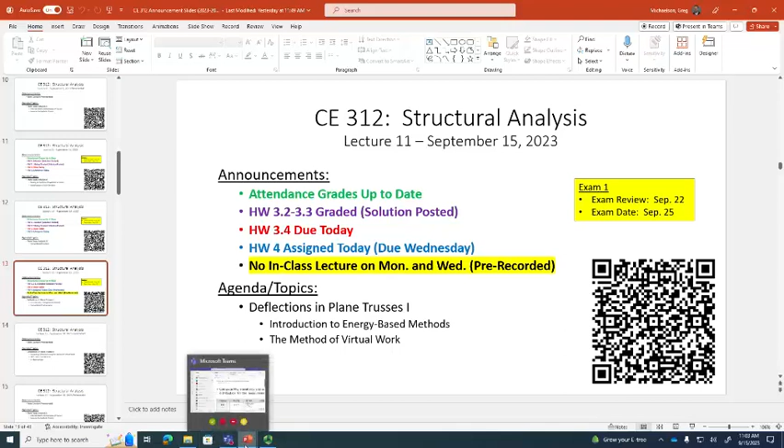Any questions? Okay, today what we're going to do is we're going to shift gears a little bit, and we're going to talk about an entirely different aspect of structural analysis, and that is deflections. Deflections, deformations, essentially the same thing. Up until now, what we've been focused on is looking at forces in structural analysis.

So we have a system. What are the reactions required to keep that system in equilibrium? Those are forces. What about trusses? We analyze the truss to determine the internal forces in each member. That's what I mean when I say forces. Now, I'm not saying those aren't important. They're incredibly important. You need those values in order to design.

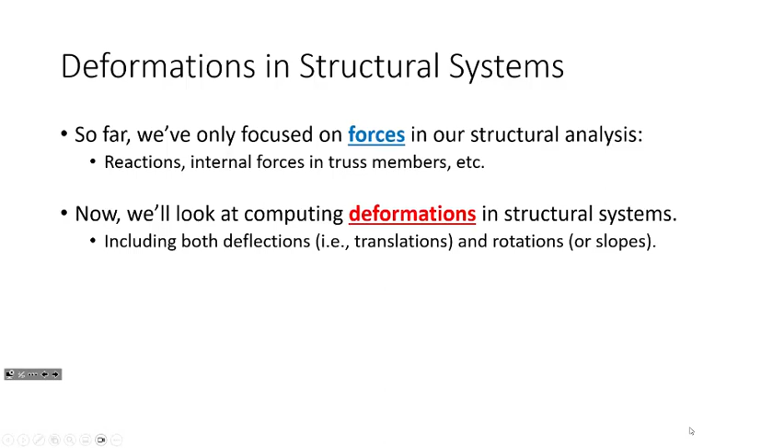But that's not the whole story. Every structural system that we utilize, when we apply forces, the system responds by deforming. It undergoes some degree of deformation, some degree of deflection, some degree of rotation, etc. That's what we're going to be taking a look at now, and we're going to start with trusses. The reason that we start with trusses is because the underlying mechanics for solving for deflections in trusses are among the easiest to deal with.

Deformations are incredibly critical to understand in structural engineering for a couple of different reasons. One of those is that we usually have deflection limits that structures have to satisfy. So as an example, we're in a building right now and we have beams and columns all over the place.

So if we're looking at, let's look at the ceiling here. Above this drop ceiling, there's a series of beams and girders that are supporting the weight of the floor above us. Let's say there's a floor beam that's going from this column right here, and it's connecting this way. Well, when we design that floor beam, we're going to have to understand the forces that are applied to it, so things like the shears, the moments, etc.

But on top of that, when that floor beam is subjected to load, it will deform, and so there will be limits on how much it can deform. A common limit that we use in building design is L over 360. So we take the length and we divide it by 360, and whatever that distance is in inches is the maximum amount it can deflect. That's a common one for buildings, and we'll talk about a little bit later about why that is.

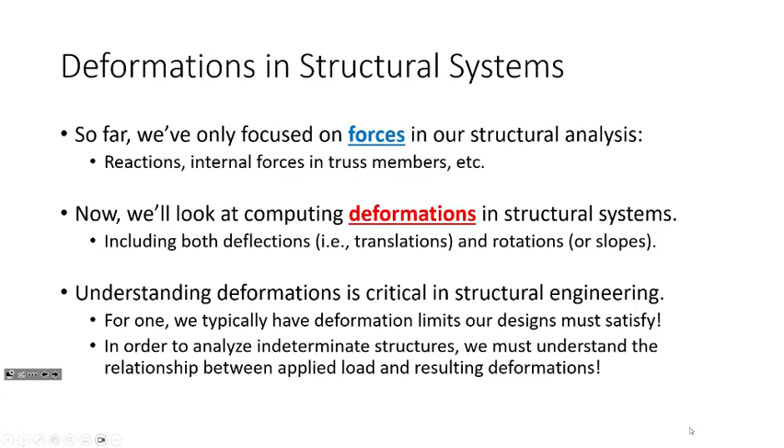So we'll have multiple limits that our systems need to satisfy. The other reason for understanding deflections is because it is the relationship between applied forces and resulting deformations that makes indeterminate analysis possible. You cannot analyze a statically indeterminate structure without understanding this relationship. If you remember, statically indeterminate structures are when we have more unknowns than equations of equilibrium. So how do we solve for those additional unknowns? We utilize the relationship between applied loads and resulting deformations, and it's that relationship that drives all sorts of advanced analyses. If you've ever heard of finite element analysis, that's how it works—it characterizes that relationship. Don't worry if you've never heard of that, we'll discuss it later.

Now I want to show you right at the very beginning how we solve for deflections, because usually engineering students are like, just tell me the answer, just tell me how we do it. So I'm going to, but I need you to understand why, because the method is a little different than probably what you're expecting. So I'm going to consider the following truss.

First off, is this truss familiar? We did this truss, we analyzed this truss in class. This was our first in-class truss example. We analyzed this truss, okay? Now I have here an illustrative example.

Let's say our goal is to determine the vertical deflection at B. Here's the structure—I've got 10 kips here, 15 kips there, 20 kips there. When I apply load, I propose that the structure deforms. I want to know, after we apply that load, how much it deforms at B, specifically how much it deforms vertically. So that's going to be the goal. We're going to use that just as an illustrative example to show you how this works.

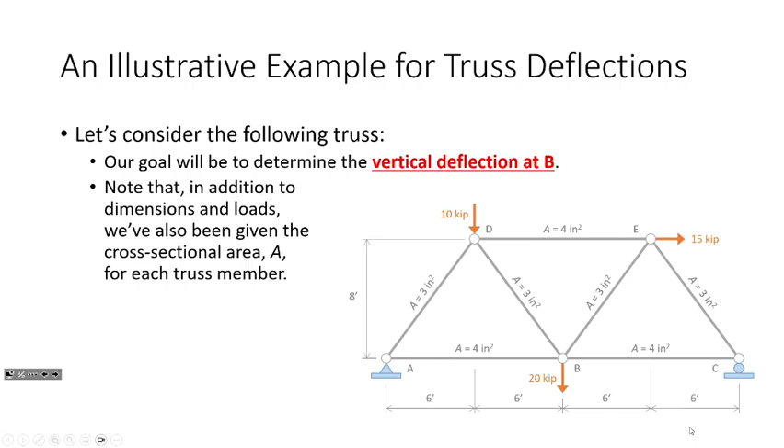Now one thing worth mentioning is that there's some new stuff here in our model. For each member, I've given you another piece of data I didn't give you before—I'm giving you the area. So if I take this member, let's say member BC, and I slice through it with a lightsaber and look at it, I get an area of 4 square inches. That's how big member BC is. With me so far? So I propose that in order to do deflection computations, we now need to start to look at the constitutive properties of the structure. We either need to know them in advance or they need to be a goal of the problem to solve for. Well, we not only need areas, but we also need material properties.

And so for the sake of discussion, I'm going to assume that this truss is made out of aluminum, and the Young's modulus, or the elastic modulus, of aluminum is 10,000 KSI. Those of you who have had mechanics and materials know what I'm talking about when I mention Young's modulus—the relationship between stresses and strains.

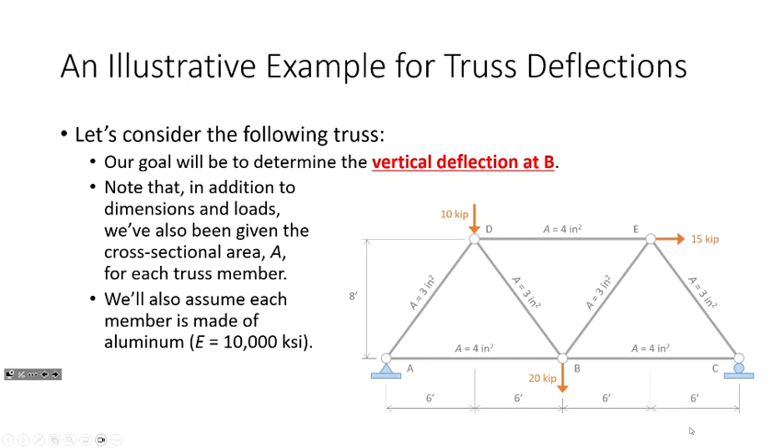Now, ultimately what I'm going to be arriving at is the method of virtual work. That's going to be the method we use to compute deflections in this course. And as I said earlier, sometimes engineering students just want me to tell them how it works. So this is how it works in a nutshell.

So the first step is you perform what we're going to call real analysis. Real analysis is just taking the truss and analyzing it for the loads that were originally on the structure. So we compute the reactions, analyze the truss, and we get this. We've already actually done this truss in this class, and these numbers I'm coming up with right here—this is what we did before. Are you with me so far? So here's the original structure, the real structure.

That's step 1. Step 2 is to take all of those loads off the structure and do the truss analysis again. But the second truss analysis, which I'm calling the virtual analysis, is a very particular truss. We take the original truss and we put a single load on it. Where do we put that load? We put it at B. Why? Because we're trying to find the deflection at B, right? So that's where we put the load.

I'm putting the load downward because I'm interested in vertical deflections, and I'm placing the load downward because I'm assuming that this joint deflects downward after all these loads are applied. The magnitude of that load is 1. We'll get to why that is in a bit, but for now, if you just want to know how to do it, that's your answer. So we place a single unit load.

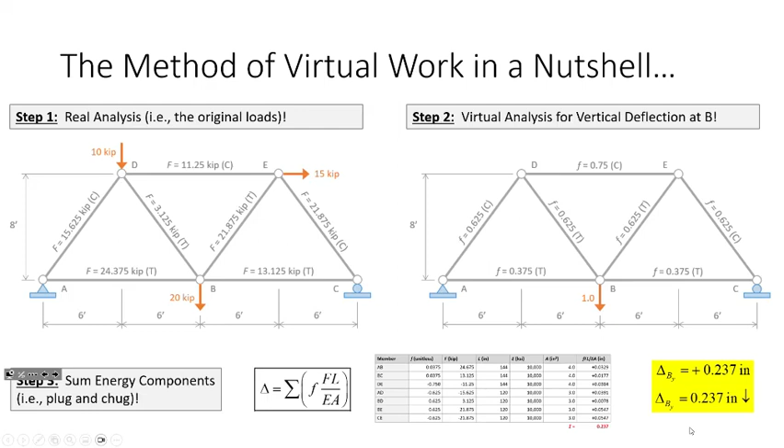So if you wanted, you could use that knowledge and actually do homework for yourself right now. There's really theoretically nothing stopping you. But I want you to understand what we're doing and why we're doing it, because I'm sure some of you are wondering where did you come up with that. Don't worry, we're going to get there.

Now, where this comes from is a method, or a class of analysis tools in physics, called energy methods. So what I want to do is talk about energy methods and the different types of energies that structures see. Some of you are thinking, energy methods, that sounds kind of fancy—it's really not. Everybody here has done energy method problems at some point.

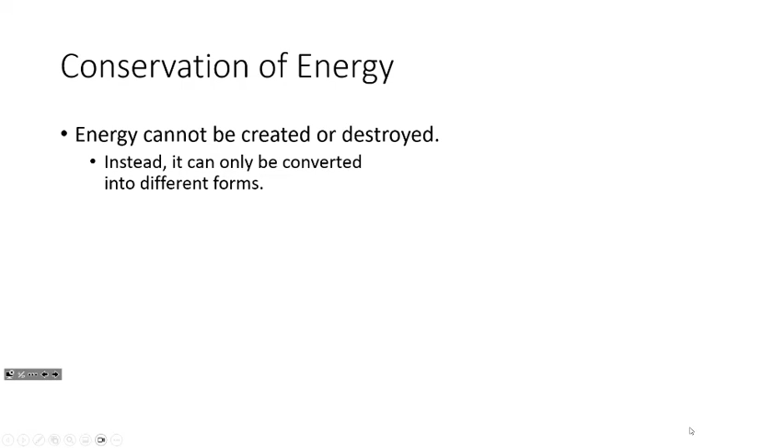Everybody has. Let's go back to the law of conservation of energy: energy can't be created or destroyed, right? It just gets converted from one form to another. So, for example, we've got here a screenshot from a very awesome video game. We've got this Goomba, sitting on top of this platform.

The Goomba on top of the platform has a gravitational potential energy of mgh. Then as the Goomba walks off the platform and starts to fall, that potential energy gets converted into kinetic energy, which we compute as 1/2 mv squared. Since energy cannot be created or destroyed, we recognize these two energies are equal to one another. If we set these two quantities equal, we see the m term cancels. This is how we know in physics that, neglecting air resistance, if we drop a bowling ball and a marble off a building, they fall at the same rate. Everybody's done this before, right?

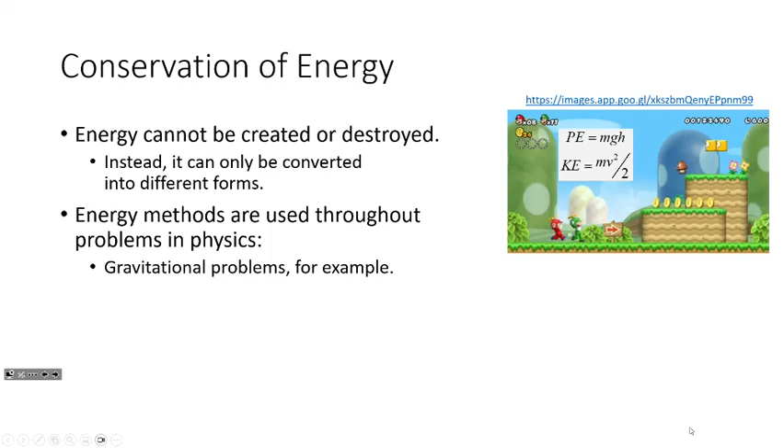I propose that we are going to apply the same concept in structures. And how's that going to work? Well, we're going to go to a different video game. Let's say we've got Link here, and Link's got his bow, and he's drawing the bow to shoot the arrow. How's this working?

So I have here a rubber band, and I have here some ammo, right—from, I'm sure you've never done this in middle school or high school, am I right? Never happened, right? Okay, so how does this system work?

Okay, so I want you to think of the rubber band as my structure. I'm taking the structure and applying a deformation to it. What's happening as I deform it is I'm storing energy inside the rubber band. That's evident by letting the rubber band go and it flies out, right?

But what happens if I take the rubber band and pull it back really far? In order to pull it back that far, I've got to use more force, I have to apply more load. But with that more load comes more energy, because now it goes even further. So there's a relationship between the amount of force I apply to the system, the amount of energy it stores, and the amount that I've deformed it. The further I've deformed it, the more load applied, the more energy stored. Does that make sense? So there's a relationship between deformations and energy.

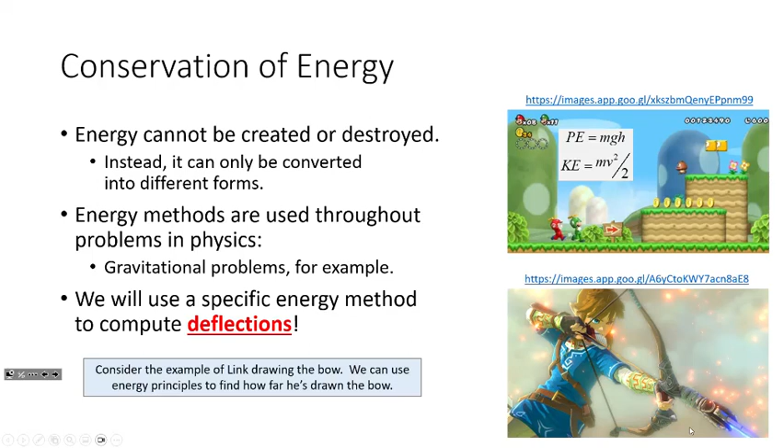And that's what we're getting at when we talk about energy methods - we're going to use that relationship in order to compute deflections. Okay, does that make sense?

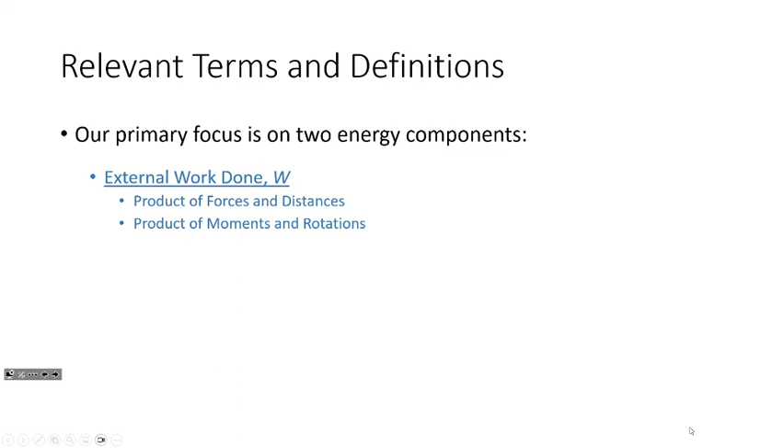All right, so I want to go through some basic terms and basic notation because I'm going to be using this throughout the slideshow. What we're going to do is look at two different types of energies that a system is going to be subjected to. We're going to use the terms W and U.

W is going to correspond to the external work done to the system. So if we think about my rubber band analogy, or the analogy of a person drawing a bow, W corresponds to the relationship between applying the force and the arrow moving - that force times distance. U is the stored energy, the amount of energy stored in the rubber band or stored in the bow.

And I propose that those two have to be equal to one another in order to conserve energy. So for all scenarios, this external work done has to equal the stored energy.

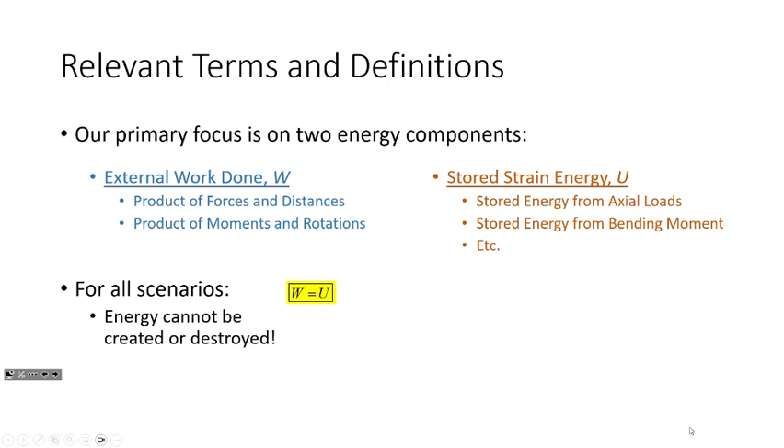Okay, a couple notes before we move on. So we're going to assume for this discussion that all the behavior of our structures is linear and elastic - in other words, they behave like the rubber band. If you go back to Engineering 216, what does linear elastic behavior mean? You have a system, you apply load, it responds in a linear fashion, and elastic means that if you let that load go, it reverts back to its original shape. And that's what we're going to assume for structural behavior, and that is the case for most structural analysis problems in the real world. It's not always the case.

There are some instances where you consider nonlinear analysis, like in seismic and dynamics and things like that. But for the most part, most everyday structural analysis is considered linear elastic. Now, we can consider other forms of structural response, like torsional response, thermal response. For the types of analysis problems we're looking at here, we can kind of neglect these. My main point is that you can use energy methods to solve all sorts of simple or complicated problems - that's why it's so ubiquitous in advanced analysis and whatnot.

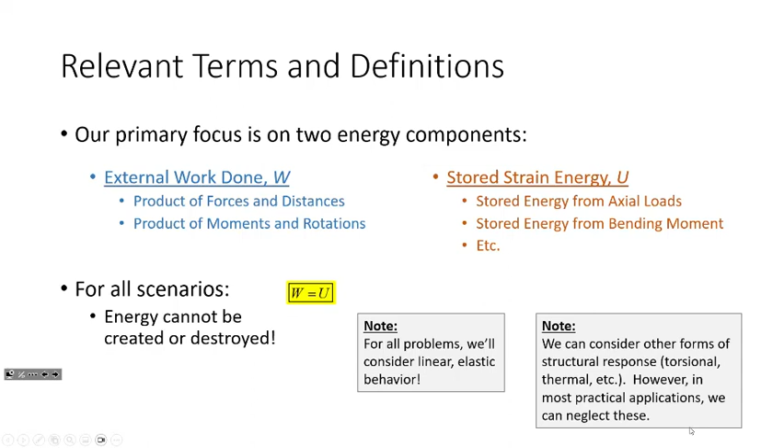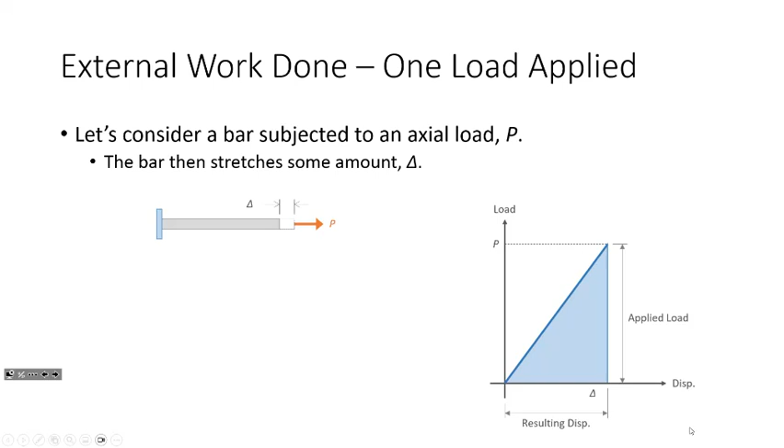Okay, so I want to look at external work done. Let's take a bar and let's stretch it some amount delta. So I propose that what I can do is say, from an external work perspective, the more load that I apply, the more deformation that I get. And if I'm trying to quantify the total amount of external work done to the system, I propose that's going to be the area under this curve, right?

Bringing it back to Math 29, right? But because we're dealing with linear elastic behavior, no need to break out the stretched-out curly S's, no need to break out any integrals, because it's a triangle. So I propose that the total external work done, if the load was applied gradually - and that's kind of the case here, because I'm applying the load gradually - the external work done is P times delta over 2, just base times height over 2. And that's the external work done to the system.

With me so far? And let's keep in mind, if we're thinking analytically, what's my goal? My goal is to try and determine this value delta. That's what I want to know - I want to know what delta is, I want to know how much it deforms. That's my goal, delta.

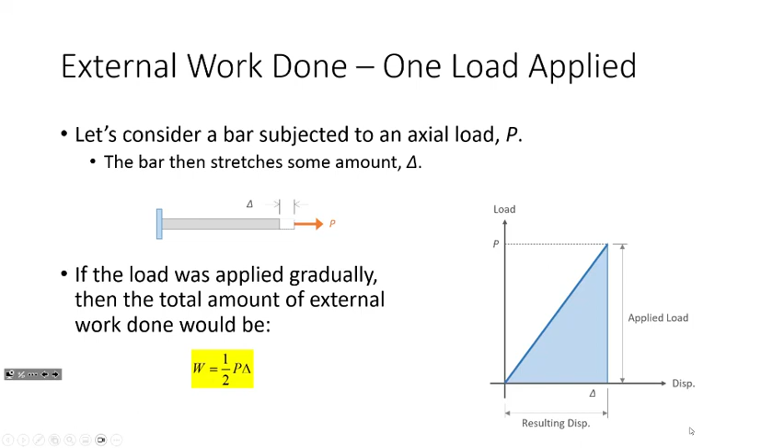Now that's the external work done. What about the stored energy? Okay, let's go back to mechanics.

Does anybody remember, if you have an axially loaded bar, how you determine the deformation? Does anybody remember that formula? You take the applied force times the length divided by EA. Y'all remember that?

Now, where does that come from if it's been a while since you've looked at that? Well, we've got our sigma equals F over A, right? Axial stress formula. That should be pretty familiar, right?

We've got our constitutive relationship, Hooke's law, that the relationship between stresses and strains can be defined by a constant of proportionality, which we call the elastic modulus or Young's modulus. And then we can say that strain is the change in length divided by the original length. Is this bringing it back? Ringing a bell? Change in length over the original length?

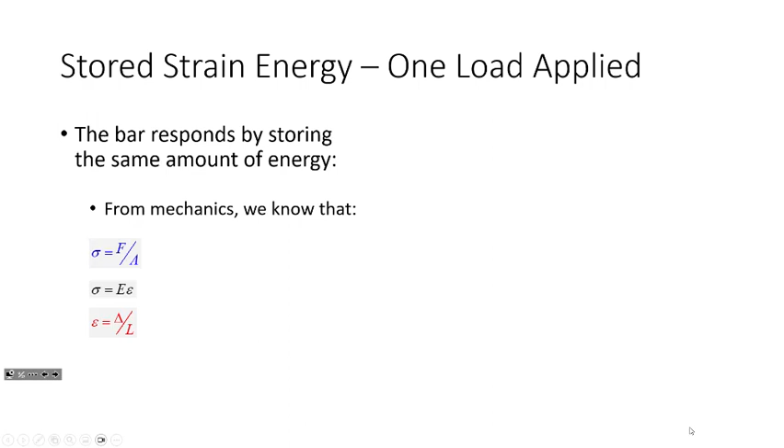So what I'll do is take this first equation, instead of sigma, write sigma equals E times the strain. Instead of sigma, let's write F over A, and instead of strain, let's write change in length over the original length. So that's where this comes from, and then I'm just solving, right? So I get delta equals FL over EA.

And so what I can do is I can write a similar curve, saying that for every amount of internal force, for every unit of internal force that's inside the system, I can increase a corresponding FL over EA. That's the deformation. Does that make sense?

So the stored energy is the area of this triangle, which is 1/2 base times height. And so that's where I get this expression right here. Okay, does that make sense?

All right, I don't want to go too fast in this. Again, if there's a detail here and there that you miss, don't worry, it's not the end of the world, but I want to make sure conceptually you're following along with what's going on. So far, so good? Okay.

Now, one thing I do want to mention, some of you might be getting a little worked up about the notation. Like, why am I using P's for the work, but F's here? Okay, well what I'm saying is there is a difference between the applied force externally and the resulting force internally.

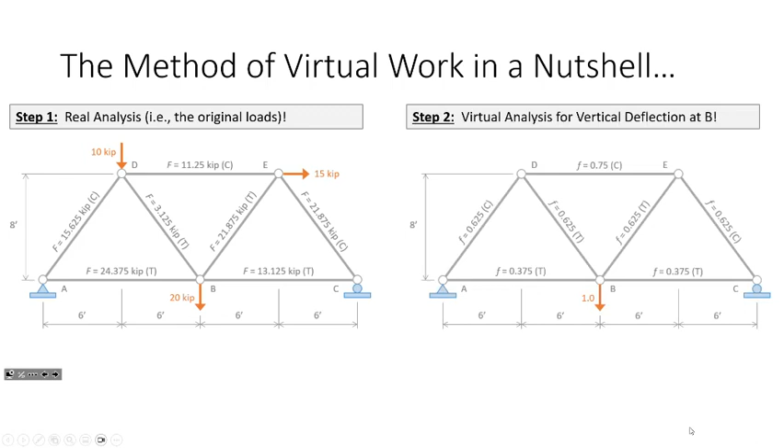So if you're seeing that and you're going, wait a minute, what's going on here, that's what's going on. Where was I? There we go. All right, so far, so good? Okay, so let's summarize where we're at so far.

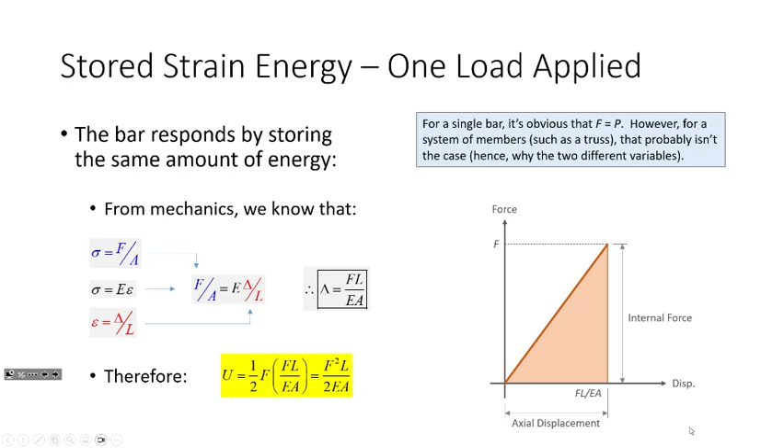So if we use the conservation of energy, you know that W has to equal U, what do we got? So for a single member subjected to axial load, we have the external work done, and we have the stored strain energy. Okay, that's for a single member. What about a system of members, like, oh no, a truss?

Well, if we have a system of members, the external work done is 1/2 P delta. The stored energy is just summing all of these for every member in the truss. Okay? Everybody kind of getting the idea?

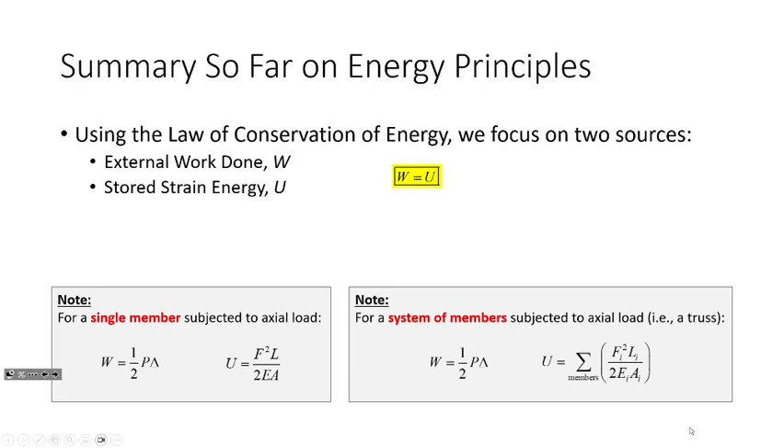Okay, now energy methods, what they do is they allow us to solve for deflections at a given point, but in order to quantify that energy, there's kind of a problem here. In order to quantify the external work done, we need a load at the point in question.

See, what we're doing right here, what this method is that you see right here on the screen, well you see this right here. This method is called the method of real work, okay? So what we're doing is we're taking the stored energy and the external work done.

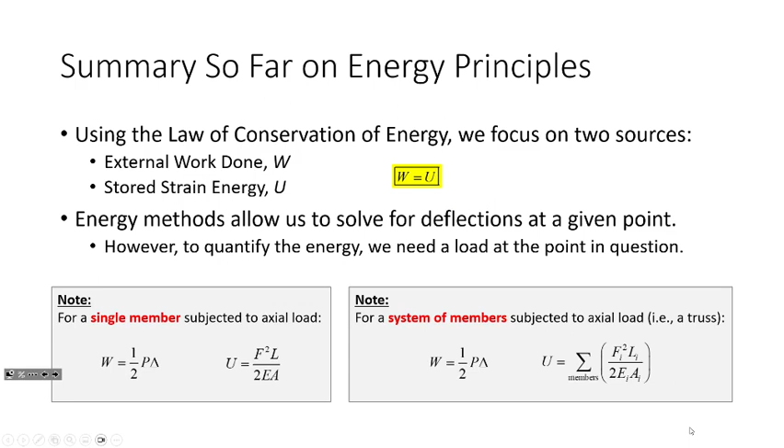We can set those two equal to one another and solve for delta. But there's a problem with that—that's the method of real work, and there's a big problem with it regarding the applied loads.

So let's talk about real loads and virtual loads. We've got an energy method that conceptually makes sense, but it's not enough. Here's the problem: the issue with this formulation, the method of real work, is in the formulation of the external work done.

I have that the external work done is 1/2 of P times delta, P being the external load applied. Remember that last truss we saw? How many different loads were on that truss? There were like 3 or 4 different loads. So which one do you use? Well, it's not that simple.

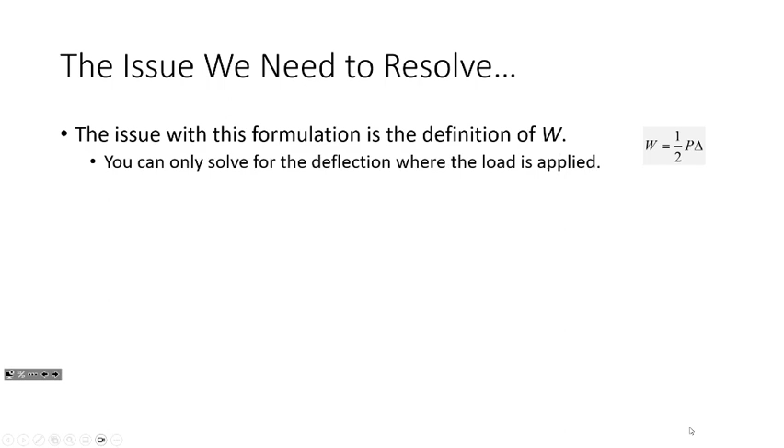You can only solve for deflection where the load is applied. If you've got multiple forces or multiple loads on the system, that makes it pretty difficult to isolate the deflection in question. It's very common in real world structures to have multiple loads all over the place. So the method of real work is not enough.

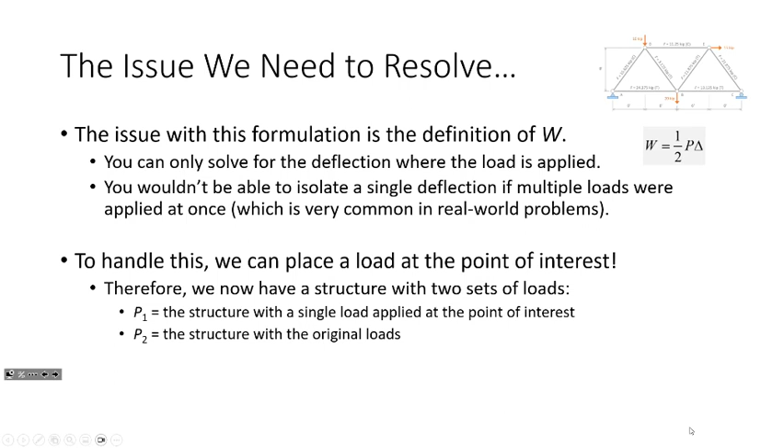So how do we handle this? We handle it by putting a load where we want to find deflection—we place a load at the point of interest. So what we're going to have is a structure with two sets of loads: one with a single load applied at the point of interest, and one with the original load.

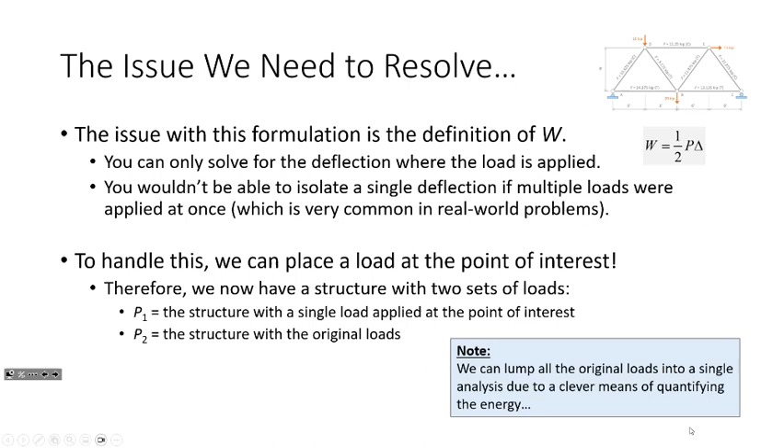We're going to get kind of clever with how we handle our energy, and clever with how we do the math, to make our lives a little easier mathematically. So let's go back to our bar example. What happens when we apply two loads? Let's see if we can clarify and flesh things out a bit.

The first thing we're going to do is apply P1 gradually. P1 is our virtual load—I like to describe it as a fake load. It doesn't really exist on the structure, but it's like a marker, similar to how in medicine they inject you with a tracer so that under an MRI they can see what's going on. P1 is kind of like that marker, allowing us to track the energy at the point in question. It's a fictitious load.

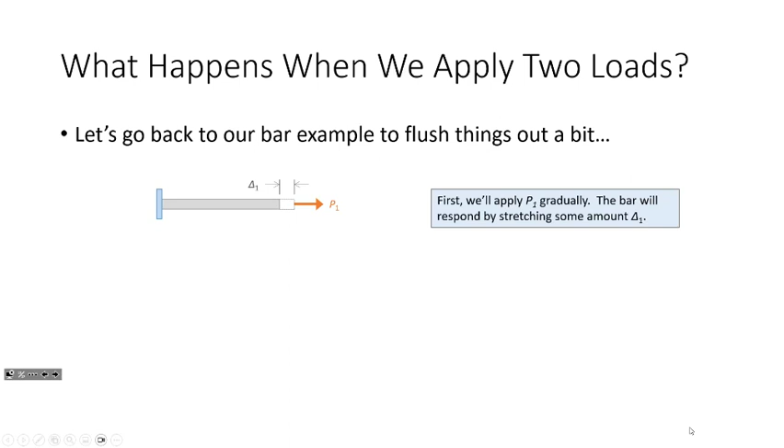First we apply P1 gradually, and the bar responds by stretching some amount, delta 1. Then we apply the real loads, P2—that's the real load, what's really on the structure. So at the end of the day, the total load is P1 plus P2, and the total deflection is delta 1 plus delta 2. Does that idea make sense?

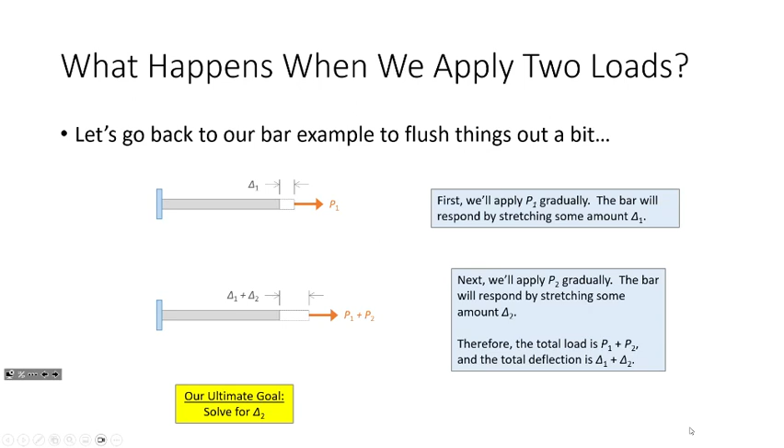Let's look at what happens when we graph this out. Remember, our ultimate goal is to solve for this real deflection. I don't care what delta 1 is, since it's due to the fake load I made up—I care about the real deflection corresponding to the real load. With me so far? Let's graph some things out.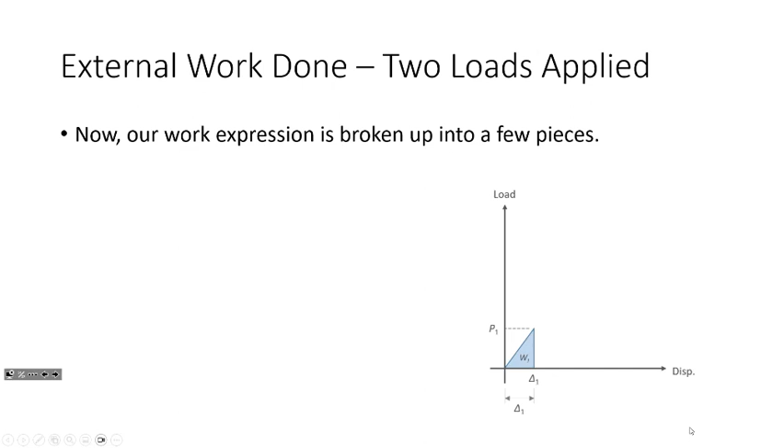So I've got a load-displacement curve here. First I put the fake load on—P1 corresponds to a deflection of delta 1. Then I put the additional load on top of it, so what I've got when it's all said and done is P1 plus P2 corresponding to a total deflection of delta 1 plus delta 2. The more load you apply, the more deflection you get.

So what I've got is this triangular region split up into different areas—I called them W1, W2, W3, just so we have something to reference. Let's write these out. You have to pay attention to your algebra: we've got 1/2 P1 delta 1, that's this one; then P1 delta 2, that's this one; and 1/2 delta 2 P2. You see what I'm doing here?

All right, let me take a step back and see. Does anybody have any questions so far? Okay, so that's my external work done. What about the stored energy?

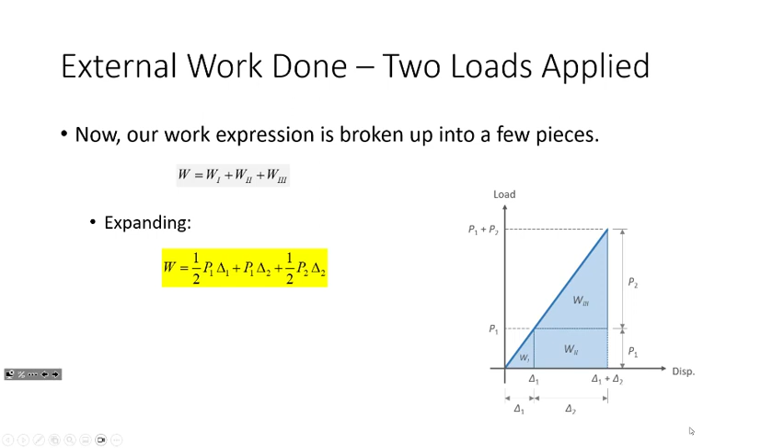Stored energy is kind of the same thing. Now I'm going to use some notation here, and this should be a little familiar. The little f's are the internal forces generated by that fake load, and the big F's are the internal forces generated by the real load.

So what do we got? We've got, you know, it's the same story. We got little load, little deflection, big load, big deflection. But let's look at the notation, right? Little f corresponds to little FL over EA, and what do we get here? Little f plus big F corresponds to little f plus big FL over EA.

And then what do we write? The energy terms the same way, right? So we take this area, 1/2 base times height, this one, base times height, this one, 1/2 base times height. A lot of symbols, I know, but does the idea kind of make sense?

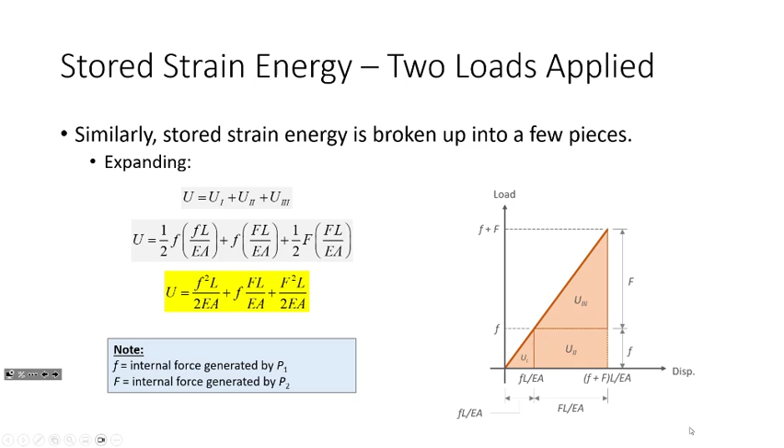All right, so let's take a step back. Let's separate it out. So there's my external work done, there's my stored energy, right? Now, what did we say? We said that energy can't be created or destroyed, right? So this energy component has to equal that energy component.

Now remember how I said we were going to get clever? Here's how we're going to get clever. I propose that if W equals U, if all these correspond, then W1 has to equal U1, W2 has to equal U2, W3 has to equal U3. And so instead of dealing with all this hullabaloo, I'm only going to deal with the rectangles, W2 and U2. So I propose those two equal one another. In other words, this term equals that term.

So I want to take this box, and I really want to focus on it a little bit. Let's see what's going on in here. So on the right, we've got some stored energy terms, right? But what's going on the left? We've got P1 times delta 2. What is delta 2? That was our goal. We wanted to find the real deflections, right?

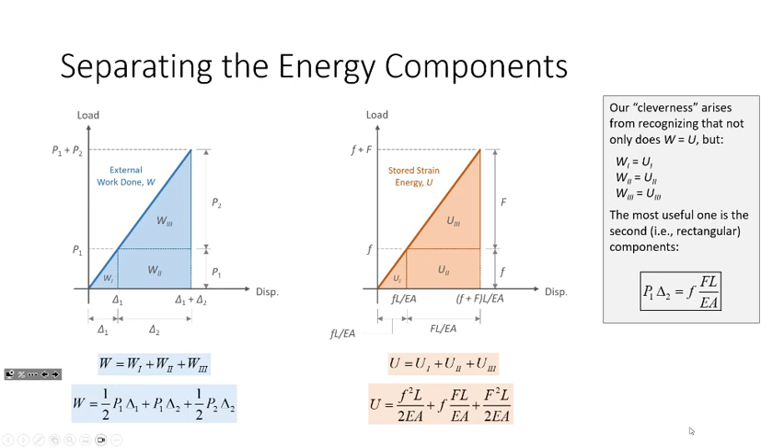P1, that's our fake load, right? That's our fake fictitious load. Now my question for you, my final question, if you were trying to make this as easy as possible, what would you choose for P1? 1, right? We would use the value 1, because if P1 is 1, we would get delta 2 is that. That's the method of virtual work in a nutshell.

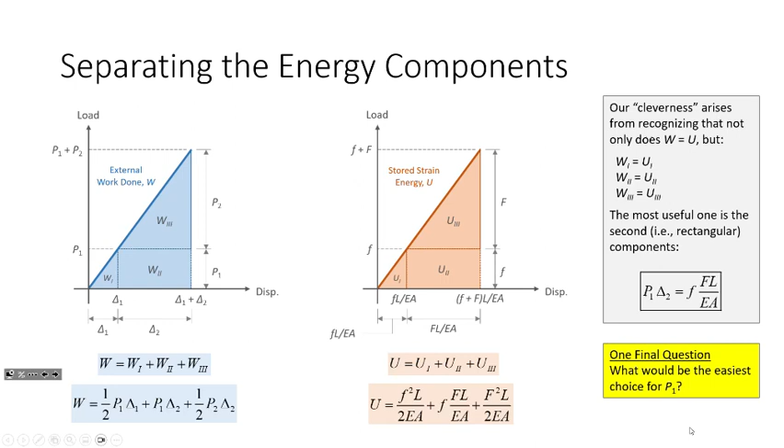Remember how we said that we would apply a unit load, and the unit load is 1? That's why. Remember, P1 is our marker load. We can choose whatever we wanted it to be, this fictitious load that we could use to track the energy. So we can choose whatever magnitude we want for P1. And so what's the mathematically easiest term to choose? 1. Make sense? That is the method of virtual work.

Okay, and I think now the crazy theory stops so we can digest what's going on here. So let's get into this a little bit. So this is the method of virtual work. It's also known as the unit load method. And what is it? It's an energy-based approach for computing deflections. The reason why I like the method of virtual work so much is because it will work for any structure subjected to any type of loading, period. Let me talk about that for a little bit.

So if you open your textbook, it has 2 different chapters on deflections, one chapter on energy-based methods and one chapter on geometry-based methods. And what you'll find is that there's oodles of different ways of computing deflections, especially when you get into geometry, but you find that those methods have certain limitations or certain advantages.

So I'll give you an example. There is a method for computing deflections in beams called the conjugate beam method. And it works fantastic when you have a bunch of point loads, because it does make the math a little easier. But whenever you have distributed loads or things like that, the math and whatnot can start adding up.

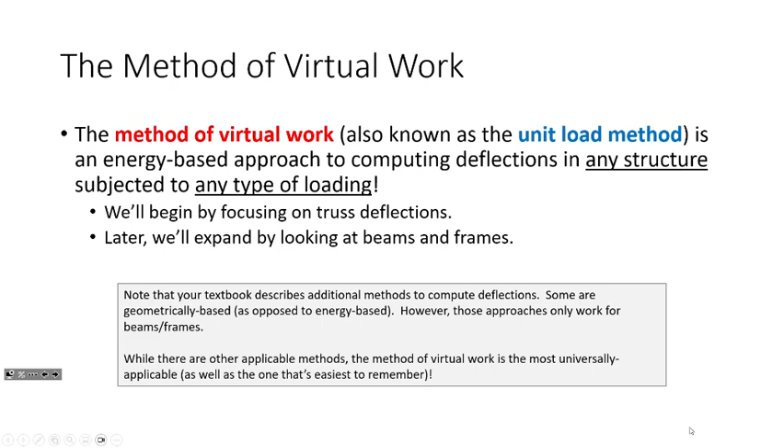But the beauty of the method of virtual work is it'll work for any structure, anywhere. That's one of the reasons I focus so much on it in this class: it's easy to remember how to do it, and it works all the time. It's really fantastic. We're going to use this method later for beams and frames. Right now we're just looking at trusses, but later on we're going to go back to this method.

Okay, let's go back to that example. Here's the truss. Now remember, we've got more data than before - now we've got areas and Young's modulus. Why? Because we need those quantities to start computing deflection, so we've got to have E's and A's in the picture. Later on when we look at beams, we're going to have E's and I's, the moments of inertia. So what do we do? We solve the structure.

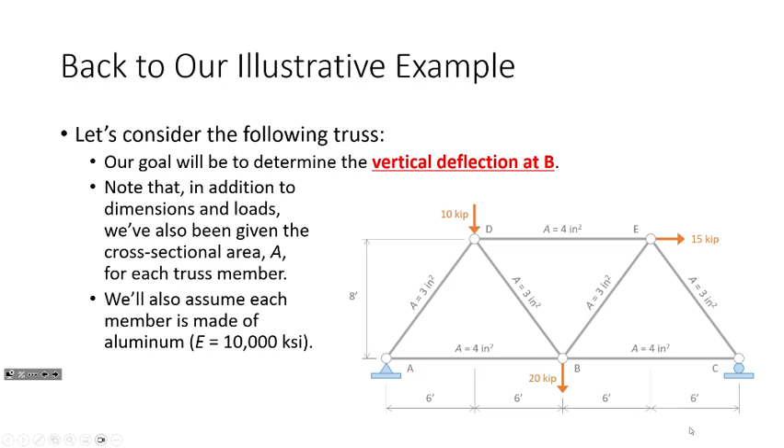We start off by determining the real forces inside the structure, so we get a real force for every member in the truss, and then we apply the virtual load. We take all the loads off the structure, remove them all, and now we have a new structure with just a single load on it. That magnitude of that load is 1, because if we set P1 equal to 1, that'd be the easiest case from a math perspective.

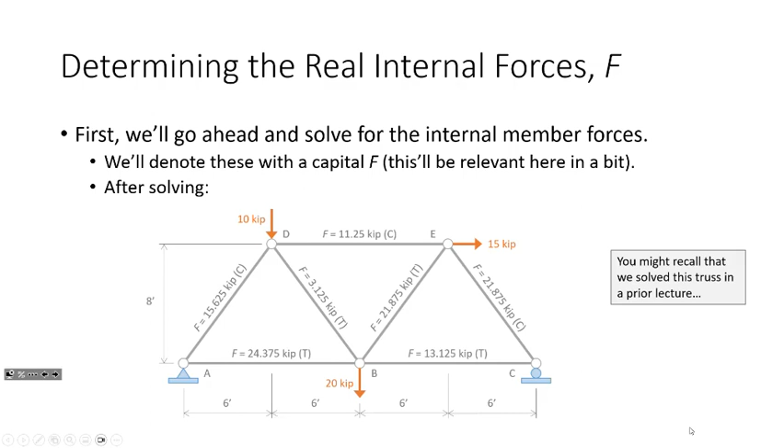We apply it vertically, because for this problem we're interested in vertical deflection at B. For example, if I asked a different question - what's the horizontal deflection at E? - I would place a single horizontal load at E. There'd be nothing else on the virtual structure but just a horizontal load at E. What direction do I place it? Whatever direction I assume the initial structure is going to deflect. If it was me, I'd look at this structure and say E is probably deflecting to the right, so I'd put a single horizontal load to the right at point E. The magnitude is 1, and you assume the direction.

And what do you do? You analyze the structure. Technically, the unit load is a load of 1. If you want to think of it as 1 kip, you can. Technically it's unitless, so the resulting internal forces are unitless. There is one downside - you do have to analyze the structure twice, which is why your homework's due on Wednesday instead of Monday. But the upside, hopefully, is that you can do things like recognize symmetry.

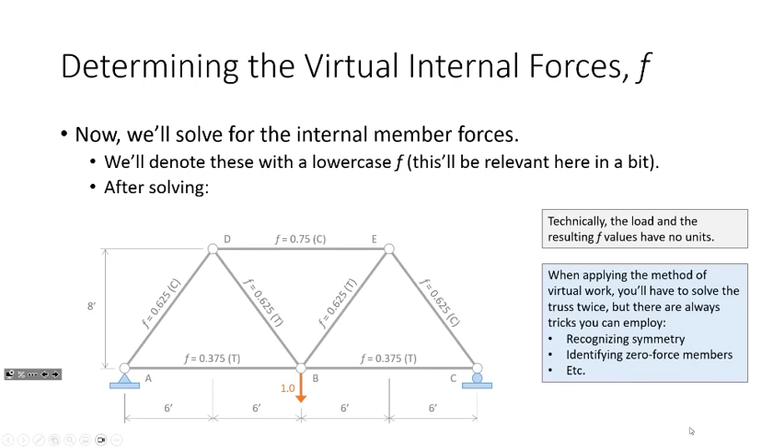You can recognize maybe there are zero force members. There might be a situation where a truss did not have zero force members for the real structure, but for the virtual structure it might. This structure is symmetric, so all we have to do is analyze that joint, maybe that joint, and then we're done because it's all symmetric. So it's something to think about - if you can exploit zero force members, it can make your life a little easier.

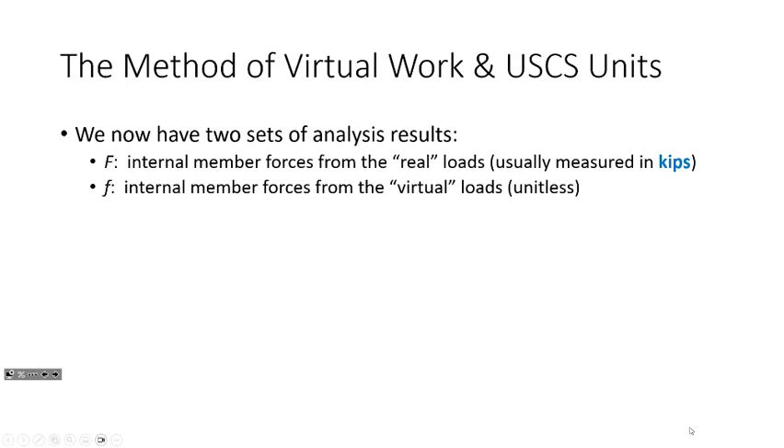And then now we apply the method of virtual work. What is the method of virtual work? We say, okay, we've now got two sets of analysis results - we've got our big F's and our little f's. The big F's are in kips, the little f's are unitless. Here's our expression: we take the little f's, the big F's, the L's, the E's, and the A's, and we sum up our energy components.

So let's talk about units. The E value is in KSI, the area is in square inches. Now I haven't mentioned anything about the member lengths - what units should I put the member lengths in? So what do we got? We got kips, KSI, inches squared. What unit should the member lengths be in? Inches. So whenever you perform your calculations, convert the member lengths to inches.

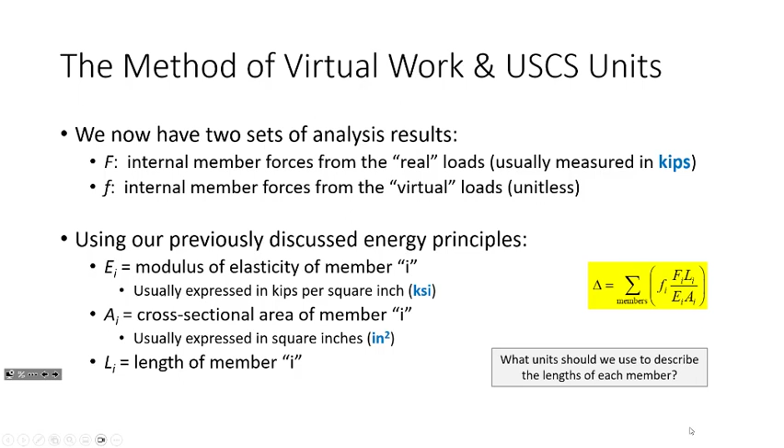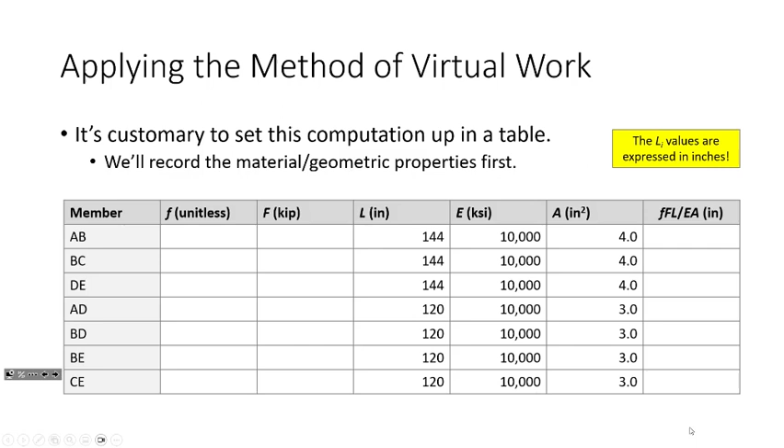So the way I like to do this - I'm an engineer, I love tables - I like to set this up in a table. So what do I have? I have a little f, big F, L, E, A column, and notice how the member lengths are in inches. And so we record all this. I go in and I place my little f and big F values.

It's customary in your table to report tensile forces as positive and compressive forces as negative. You could do it inverted, it wouldn't matter, just as long as you're consistent.

So for every member, I go back to the truss analysis and say, member AB, for the virtual structure it was in tension, and for the real structure it was in tension too. This one was in compression, so it's negative, and this one's in compression, negative.

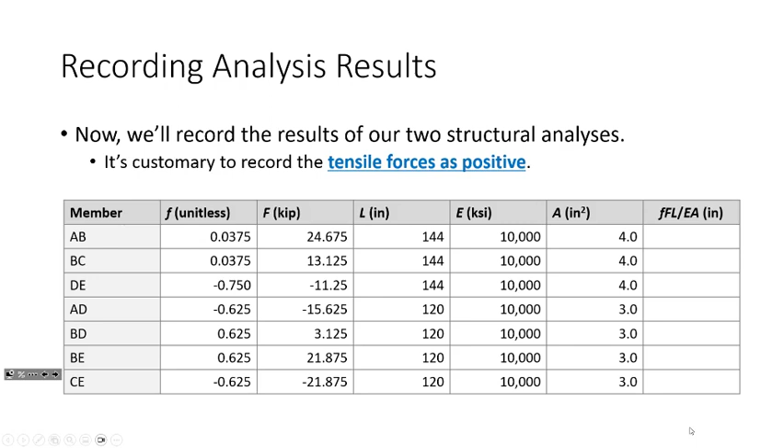And then for every row, I say okay, little f, big F, L over EA. Little f, big F, L over EA. Little f, big F, L over EA.

Anybody think about a program that we might use to make our life a little easier? This is an Excel problem in there, right? This will make your life a lot easier on a homework assignment to utilize Excel to do the calculations for you.

So little f, big F, L over EA, do that across the board, calculate each of these, and when you sum it, you're going to get an answer. If you track the units for each of these energy components, the units are inches. So sum all this up.

We've got P1 delta 2 is the sum of little f, big F, L over EA, and what we're getting is 0.237 inches is P1 times delta 2. And how much was P1? 1. So delta is 0.237 inches.

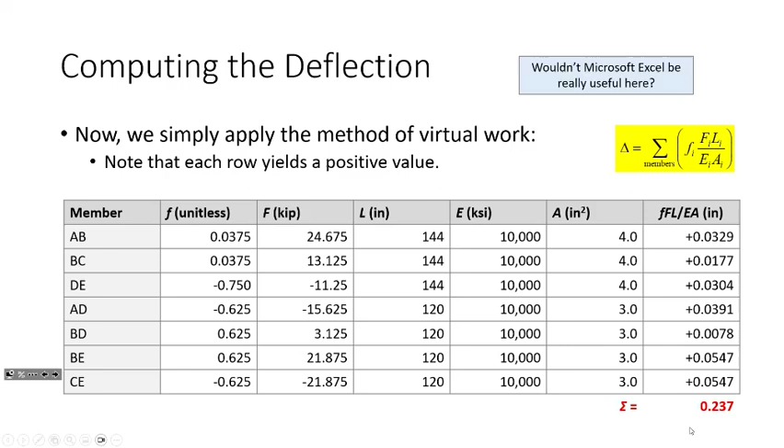So again, whatever that sum is, that's your deflection. It's that simple. And we got the deflection was positive, which means our assumed direction was correct. We put that virtual load going downward. The deflection at B in the y direction is 0.237 inches going downward. And that's it. That is the method of virtual work.

So like I said, I knew today would be a little different, a little more like movie time, but I want to take a step back and see if this made sense. Does anybody have any questions about the idea, the concept?